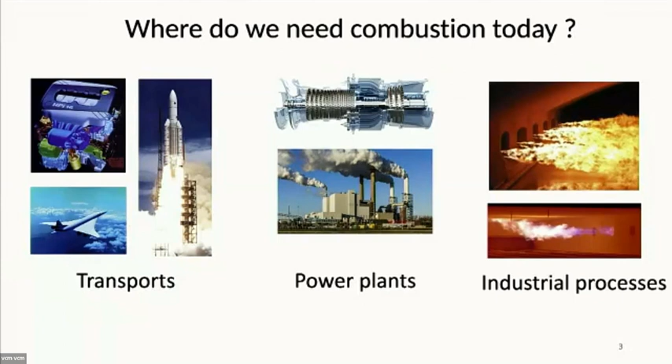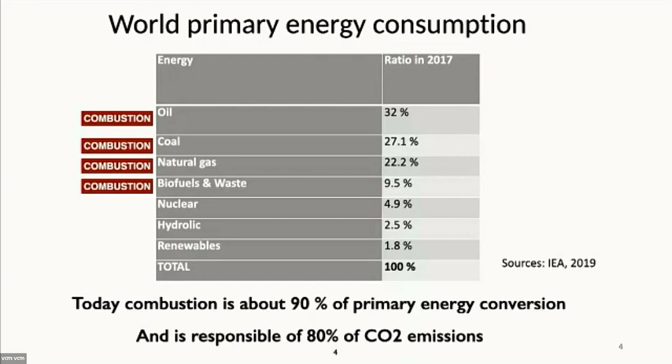So the first question is, where do we need combustion today? If you have a quick look at where we need combustion, we use it in transport, power plants, and industrial processes. If we look at world primary energy consumption, and at what is the primary source of combustion, it's oil, followed by coal, followed by natural gas and biofuel. All of these are burned. And if you sum it up, you will figure out that combustion is about 90% of the primary energy conversion, and it's also responsible for 80% of anthropogenic CO2 emissions.

So now the question is, how do we meet the Paris Agreement on Climate from that point of view? Can we do without combustion? If you look at thermal car engines, it's clear that they tend to disappear for small vehicles in Europe. All new cars sold in Europe must have zero CO2 emission in 2035. So it's clear that it's the death of the ICE engine for small cars. However, ICE may still be a solution for heavy-duty vehicles and boats.

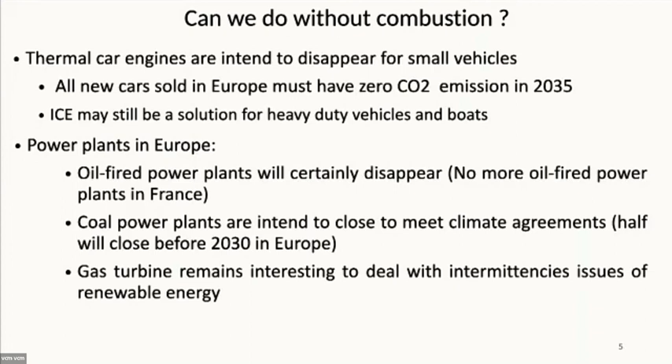Regarding power plants, there are no more oil-fired power plants in France. They intend to disappear in Europe. Regarding coal power plants, it's a bit more complex because it depends on the energy policy of each country in Europe, but apparently half of them should close before 2030. So the future won't be coal, fortunately. Gas turbines, however, remain interesting to deal with intermittency issues of renewable energy.

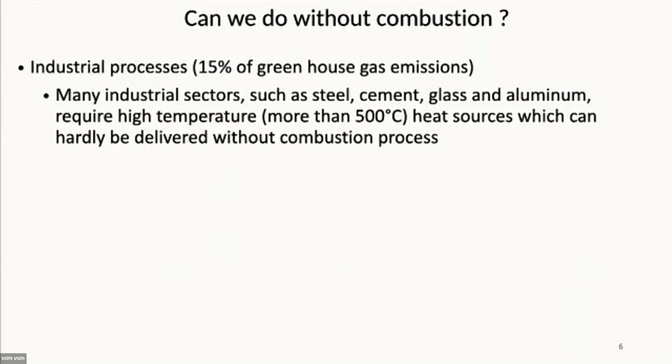Now, maybe less known: industrial processes. Industrial processes represent 15% of greenhouse gas emissions, and many industrial sectors, such as steel, glass, and aluminium industries, require high temperature sources that you cannot manage without a flame. So you need flame to produce glass. And finally, I will conclude with aircraft. The math is quickly done: 1 kilogram of kerosene represents, in terms of energetic density, 50 to 100 kilograms of batteries. So electrification will not replace combustion in aircraft in the short term.

So it means that combustion won't disappear now, but we need to do something: it's our mission to decarbonize the flames. If you look at the aircraft example, this is a roadmap of the aircraft industry, at least Airbus's. The idea is to put hydrogen at the center of the propulsion device. Hydrogen can be synthesized from H2O and, let's say, green electricity.

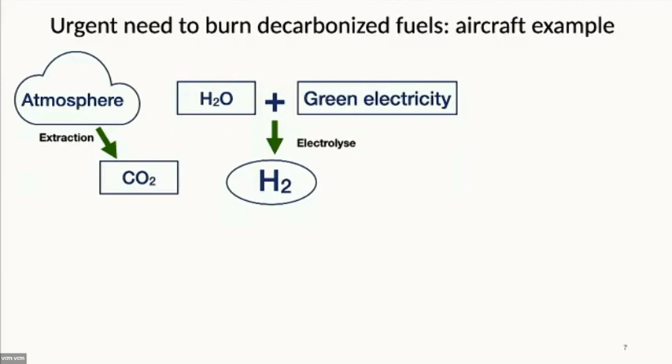If you can succeed to extract CO2 from the atmosphere, you can combine CO2 and H2, and using the well-known power-to-liquid route, it's possible to synthesize sustainable aviation fuel. You can also directly synthesize sustainable aviation fuel from biomass. Sustainable aviation fuel has a composition very close to kerosene, at least it can be done like that, which means it can be used as a drop-in fuel. At the end of last year, in 2021, the first aircraft fueled by 100% SAF flew.

Now it's interesting to see what the impact of this change will be in terms of CO2 emissions. This graph is extracted from a think tank work called the SHIFT project, led by Jean-Marc Jancovici. They did a study in France and tried to predict the scenario of CO2 emissions depending on the actions taken. The black line here is a target you must satisfy to stay below 2 degrees Celsius of global warming.

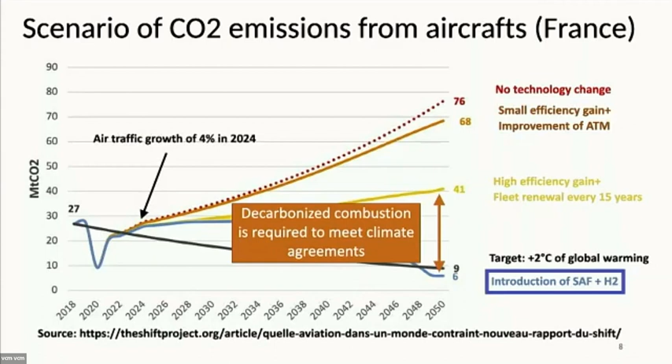Now, if you introduce sustainable aviation fuel and hydrogen gradually, then you can pass below that limit. So decarbonized combustion is required to meet this climate agreement.

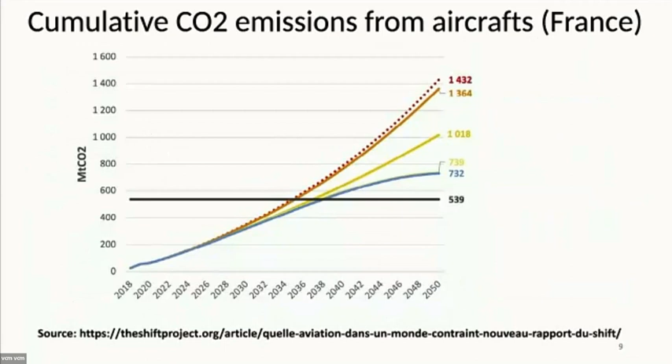Well, what's not totally true is that if you plot the cumulative CO2 emission, you're not good enough, because it takes too long to pass below this limit. So it means that it won't be sufficient. The decarbonized combustion flame alone will not save the world. We also need to take the plane less. That's what he's saying: to pass below this limit in 2050, air traffic growth must stick to 0.7%, even not decreasing, but not moving to 4%.

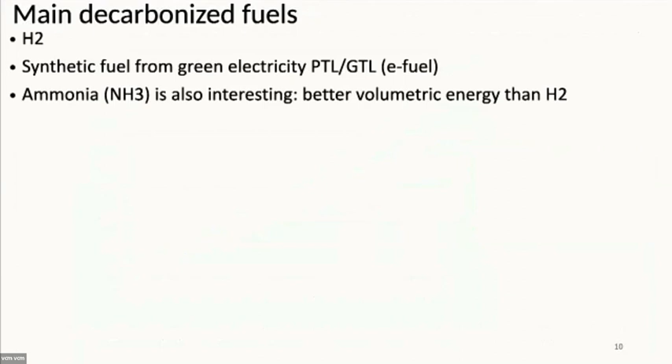What are the main decarbonized fuels? The main decarbonized fuels are hydrogen, synthetic fuel from green electricity (all kinds of e-fuel), ammonia—which is interesting because it has better volumetric energy than H2—and biomass/biofuel, such as bioethanol and so on. All of these are CO2 neutral.

So they don't produce CO2. However, pollutants are still emitted—unwanted species such as unburnt hydrocarbons, soot, carbon monoxide, sulfur oxide, and mainly nitrogen oxide. The problem with these species is that they are dangerous even in small quantities, for both health and climate. So there's a challenge now for combustion engineers.

What they need to do is design low-pollution combustion chambers for decarbonized fuel—how to burn this new fuel while keeping low pollutant emissions. The main strategy is to control the temperature, to decrease it. It's well known that if you decrease the temperature, you reduce NOx production.

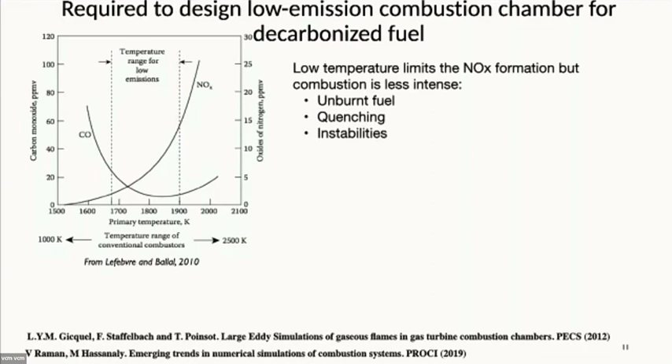However, the problem is that if the temperature gets too low, you will not burn correctly—you won't burn everything, and you may produce CO. You can also promote quenching issues, which lead to instability problems. So the big challenge of designing future combustion chambers is here.

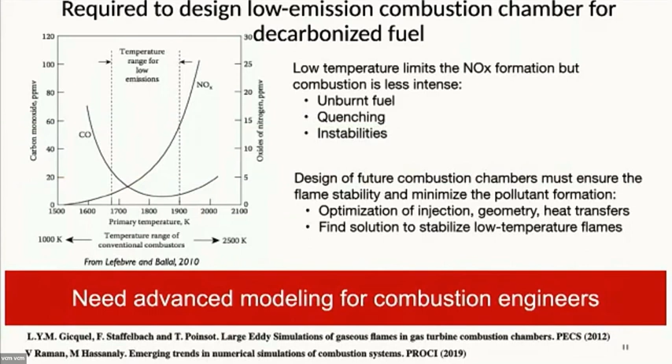You must ensure flame stabilization while still minimizing pollutant formation. This means you need to optimize the geometry, the combustion chambers, the injection system, and perhaps find new and innovative solutions to stabilize low-temperature flames. For that, you need advanced modeling—this is our job as combustion engineers. There are a couple of reviews I'll mention that discuss this in detail.

To summarize, let's talk now about the physical challenge. Physical challenge for high temperature combustion regime are not so high. Why? Because in terms of turbulent and chemistry interaction, turbulent mixing timescales are quite disconnected to the flame chemistry.

Under high temperature condition, chemistry is very active and very fast, so the interaction between flame and chemistry is quite limited, and the old-fashioned model works quite well. For instance, if you do some infinitely fast chemistry assumption, you will have a very good prediction of a turbulent non-premix flame. If you use a global step mechanism fit to retrieve the flame speed, then you will have a correct prediction of the flame stabilization for a premix flame.

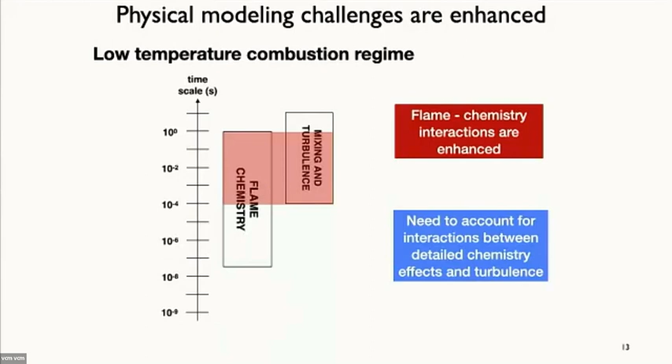It starts to be more complicated when you move to low temperature flame. Why? Because the chemistry is less intense, and you will broaden the range of interaction between the chemical species and the turbulence. This enhances the flame chemistry interaction and makes things more complex. So we need to account for interaction between detailed chemistry effects and turbulence.

This gives us the introduction of my talk, and the objective today is to discuss the modeling strategies for including detailed chemistry effects in turbulent flame simulations. I will mainly have two parts. First, I will talk about simplified chemistry models, and then I will discuss the coupling of chemistry modeling with turbulent flow simulations.

The complexity of a detailed chemical scheme is directly connected to the nature of the fuel that you are burning. If you consider H2, with 10 species and about 50 reactions, you are able to reproduce quite well the flame heat release and the flame speed. However, if you want to include NOx formation, or if you want to burn ammonia, then about 30 species are needed, and you need to account for around 200 reactions, which is not so small anymore.

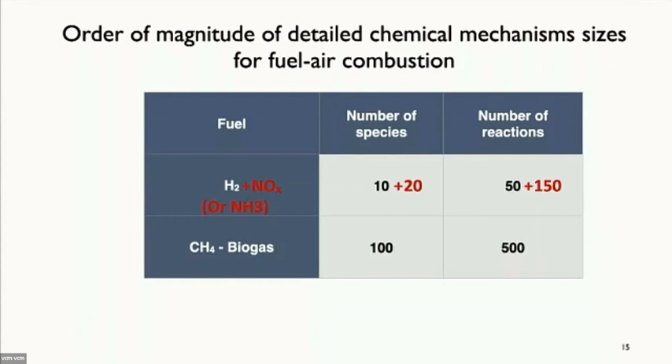If you move to methane, you need 100 species. And if you want to consider kerosene or sustainable aviation fuel or biofuel, then at least 1,000 species and several thousand reactions will be needed.

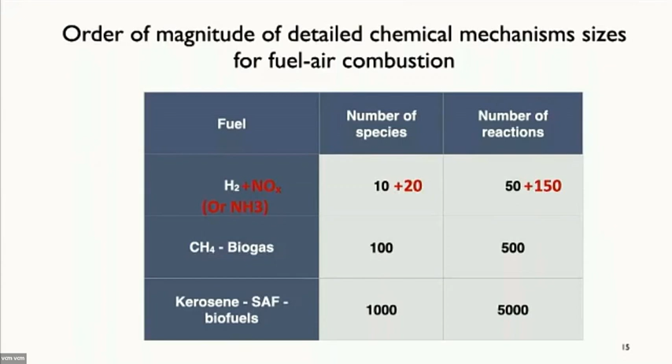What is the problem? The problem is that now I want to connect this detailed chemical scheme with a CFD flow solver. I have to come up with a standard Navier-Stokes equation: continuity, momentum, and energy. And then I need to add one balance equation for each species involved in the detailed chemical scheme. So you end up with this set of balance equations.

And here you have to face two problems. First, there are too many equations. The number of equations is very high, so obviously it will be complex to solve. Secondly, it's not the only reason.

Secondly, these chemical reaction rates are very, very stiff. Why? Because there are radicals that are highly produced and highly consumed. This causes very small time scales, very short time scales, and also stiff gradients. Numerically, from a numerical point of view, capturing this is very costly.

So the challenge is to simplify this chemistry modeling, but still we want to predict physical phenomena which are sensitive to complex chemistry effects, such as pollutant formation or extinction or ignition phenomena.

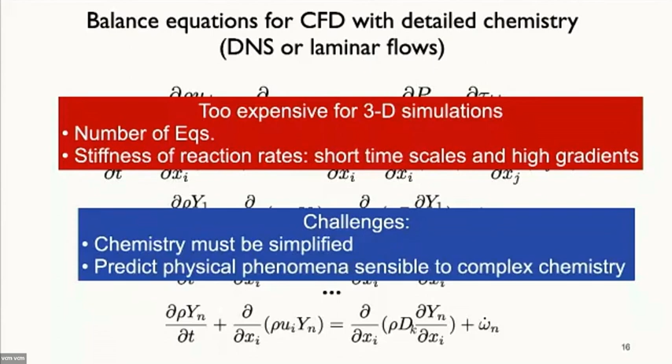So let's consider now a detailed chemical scheme made of N species. Any thermochemical variables, such as the chemical reaction rates, can be expressed directly in a space called the chemical space. It will be uniquely defined by Arrhenius law in this chemical space made of the pressure, temperature, and a vector of species mass fraction of dimension n.

So it means that any chemical scheme will be defined, will have a given range of validity. So the range of validity of a detailed scheme covers a space or a subspace in a chemical space.

The fact is that most of the time, when you want to use a detailed chemical scheme to compute a practical application, the chemical space covered by a practical application is in general much smaller. You don't use all the space, the range of validity. So this detailed scheme is somehow oversized in comparison with what you need.

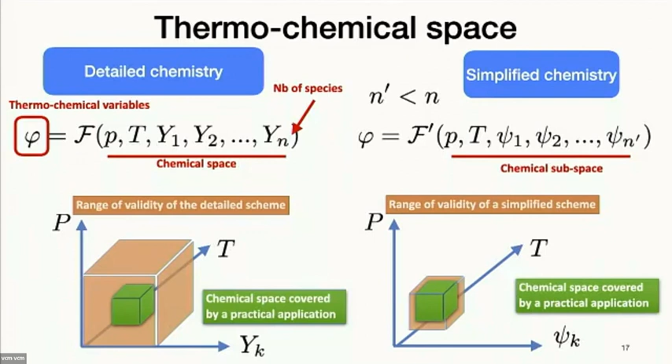So this is the idea of simplified chemistry models: to find a dimension smaller than the number of species, to re-express this thermochemical state in a new chemical subspace. And the goal of the game is to find a simplified scheme whose range of validity is as close as possible to the chemical space covered by a practical application. So from that, several methods have been developed by researchers to simplify the chemistry modeling. There are mainly three main approaches.

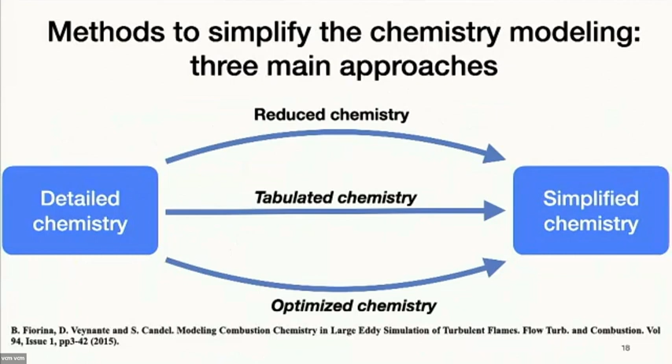The first one is to reduce the chemistry. The second one is to tabulate the chemistry, and the last one is to optimize the chemistry. So I will discuss briefly all these methods.

One of the most famous methods is reduced chemistry. It's composed of two main steps. You start from a detailed chemical scheme, and the first step is to obtain a so-called skeletal mechanism. For that, you need to remove redundant species and reactions that will not affect some target flame properties.

This was initially done by hand, so it was complex to apply to large and very large mechanisms, but significant improvements have been made by several authors, such as Turanyi with the introduction of the sensitivity method, and then Lu and Law proposed the DRG method, which was extended to the DRG-EP method by Pepiot-Desjardins and Pitsch.

Once you have this skeletal mechanism, you can proceed further with the reduction by finding analytical relations between species. In general, you do that by assuming quasi-steady state. Again, automatic methods have been developed, such as CSP or the level of importance method.

If you find an analytical relation between two species, it's good because you don't need to transport these two species anymore. Only one balance equation is required, so you can save, again, CPU time.

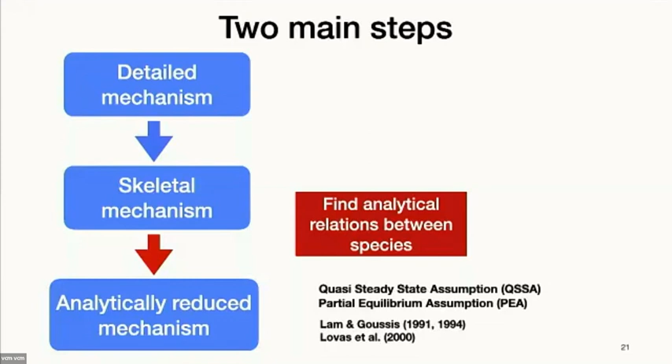So now tools are mature enough — there are several tools that have been published, mature enough to automatize the reduction process. We can, for instance, cite the Arcane code, developed jointly between Cornell University and CERFACS.

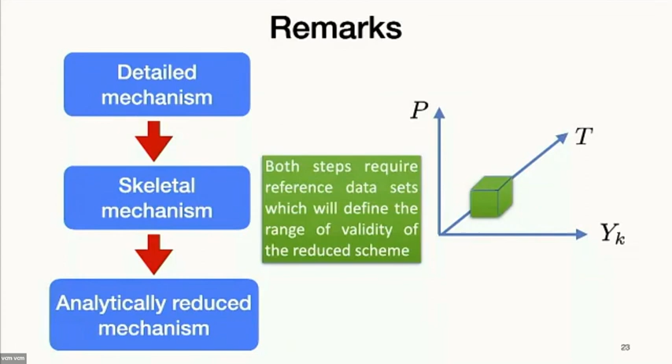It's important to note that both steps require a reference data set. If you want to find which species are redundant or which species are at quasi-steady state, you need to define a reference case to compute these terms, and by doing so you will somehow define a range of validity. I will show you an example.

For that, I took the LU19 analytical mechanism developed by Lu and Law. They start from a detailed GRI mechanism made of 53 species. They applied the DRG method to obtain 36 species and 222 reactions, and then they find an analytical relation between species by applying quasi-steady state assumptions.

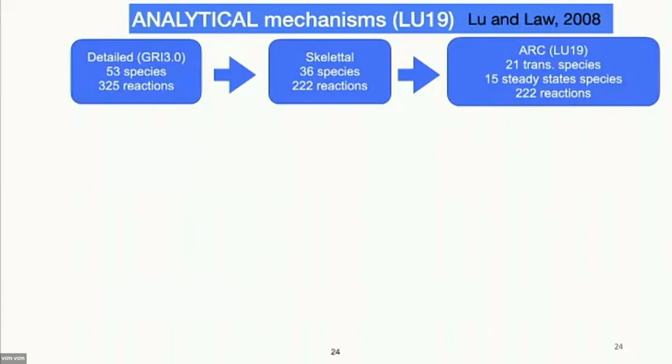I will now compare the reference detailed chemical scheme with this analytical scheme. There is a canonical but challenging case to check if a reduced scheme is working: take simply two flames, one premixed flame and one non-premixed flame. If you are able to capture both flame configurations with the same reduced scheme, you are doing a good job.

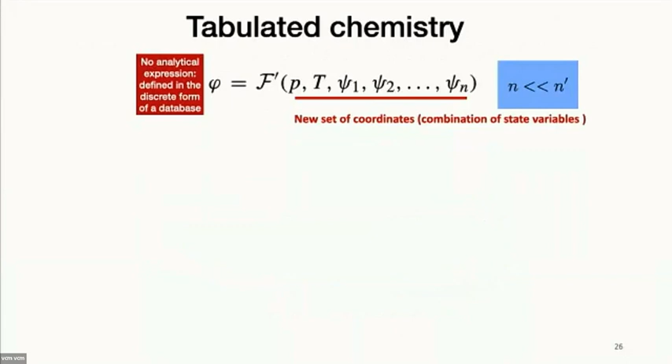Now I will introduce the other method: tabulated chemistry. The idea is not only to reduce the number of species, but to go a bit further — to re-express or project the thermochemical state into a new set of coordinates with much lower dimension. In general, this set of coordinates is a combination of state variables.

The objective is to tabulate the thermochemical state in a lookup table during a pre-processing step. The key issues are how to identify this reduced subspace and how to build up the chemical table or manifold. Sometimes you can also have issues because the table becomes too heavy and you may have memory size issues.

Tabulated chemistry is very efficient because the accessed space is confined to a low-dimensional manifold. This has been observed by Ulrich Maas and Dominique Thévenin. They did an interesting simulation.

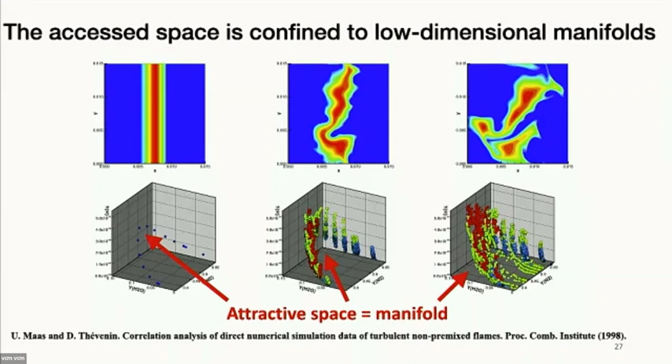H2, H2O, and H. What you can observe is that there is an attractive space, called a manifold. There is an attractive space, and you can also observe that the dimension of this attractive space tends to increase with the complexity of the problem. But there is a strong attractive space.

Initially, Ulrich Maas and Steve Pope proposed a method to automatically identify this attractive space. It is the so-called ILDM method. They succeed in identifying this space by computing the eigenspace decomposition of the Jacobian of the reaction rates.

This works very well if you want to capture the high temperature region of the flame. However, you start to have problems in low temperature flame because the chemical reaction competes with the molecular diffusion, and the size of the attractive manifold becomes too large, or at least with ILDM it's difficult to compute.

So an alternative used in many applications today is to compute directly the manifold from laminar flame elements. This method is called flamelet, or flamelet-based tabulated chemistry method. The idea is to identify a set of flame elements, so initially you choose premixed flamelets, non-premixed flamelets, or a zero-D reactor, for instance.

If you use non-premixed flamelet, you are using the so-called flamelet model developed by Peters. If you use premixed flamelet, these are the FPI or FGM techniques. A flamelet library is computed after selecting this flamelet.

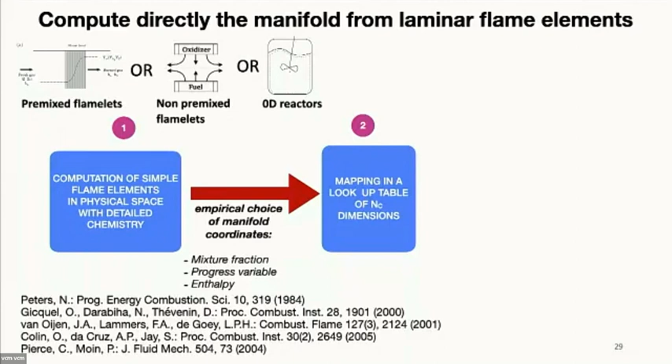But this is completely empirical, so you have to do it a bit by hand. At the end, everything is mapped in a lookup table of NC dimension, where NC is the number of manifold coordinates. You can then couple this manifold with a CFD solver by solving, in general, one balance equation for each

manifold coordinate, picking from the chemical lookup table the thermochemical ingredients needed to perform the simulation. This works as soon as the range of validity of the tabulated chemistry method is in agreement with the chemical space covered by the applications you are targeting.

If we go back to our previous example, we have computed a chemical lookup table made of premixed flame elements. If you use this chemical lookup table to compute a premixed flame, there is no surprise, it works very well. You see an excellent agreement between the two solutions.

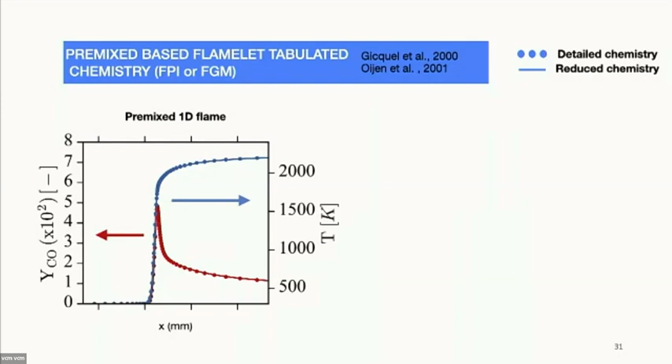However, it's not going to work anymore if the chemical space covered by the practical application does not fit completely the range of validity of the tabulated chemistry model. If you do the same exercise as before and apply this tabulated chemistry method, made of premixed flamelet, to a non-premixed flame, we will see that the temperature is quite well reproduced. It's quite okay for the temperature, but you completely mispredict the CO mass fraction, so there is a poor prediction of CO with the tabulated chemistry approach.

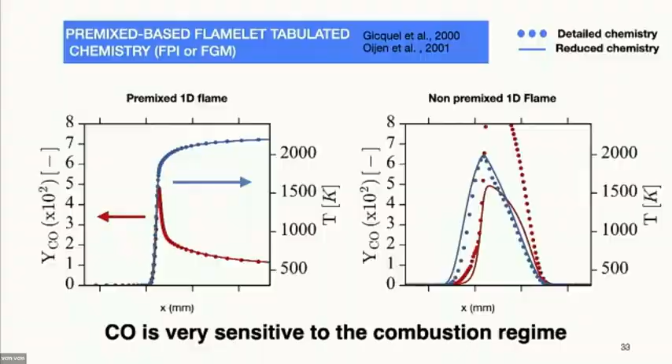So what to do? There are several solutions for that. The first solution is to compute multi-regime manifolds. Instead of first computing elements in the physical space and then projecting into the manifold, it's possible to directly write down the balance equation of the manifold directly in the reduced coordinate space. This is the REDIM, reaction diffusion manifold approach, developed initially by Bykov and Maas.

An alternative is also the multi-regime flamelet manifold, which is a similar technique. The fact is that when you write down this equation, there are some terms that appear, which are the gradient of the coordinate in the physical space, and these terms need to be modeled. How do you model this term?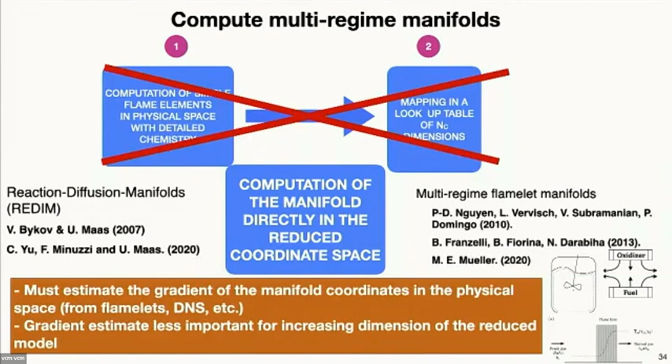You need in general to define a reference combustion element, so again you need somehow some physical representative flamelet at the end to close this equation. However, it has been observed that this gradient estimate is less important as the size of the manifold increases.

So an alternative would be to include directly a wide range of different flame elements in the same manifold. I told you before that in general we either choose premixed flame, non-premixed flame, or zero-D reactor to be tabulated in the same table. Here, the idea will be to try to tabulate all these terms in the same database.

The problem is the empirical choice. It's not complex to compute these flame elements, we know how to do that, but the question is how to empirically choose the manifold coordinate. It's not going to be trivial anymore to find the right coordinate.

Here, machine learning tools are quite interesting for that. For instance, if you look at the work from Alessandro Parente's team, they use machine learning to identify this technique, and in particular they develop the local PCA, principal component analysis method, which is good because it can post-process an ensemble of data and find what are the best coordinates that reproduce most of the variance of the covariance of this data.

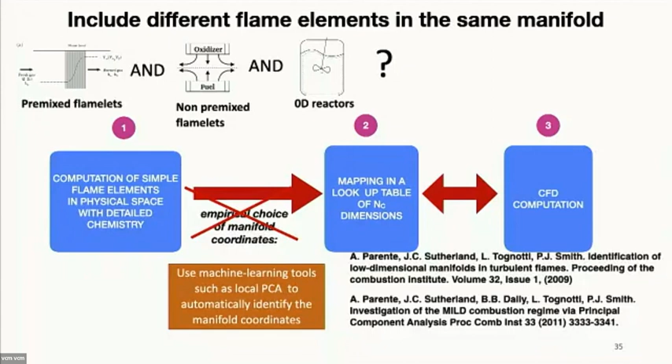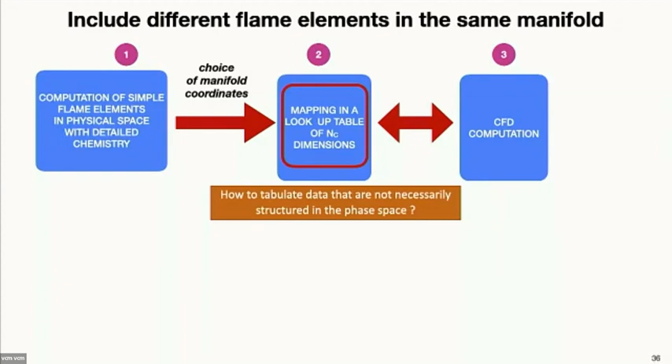Then you have to face the second issue: when you have many different data to be tabulated, these data are not necessarily structured in the phase space. So you need to find a solution to interpolate this data, and for that you can also use supervised nonlinear regression algorithms, such as neural networks, artificial neural networks, or Gaussian process regression. So these are the actual research topics on that.

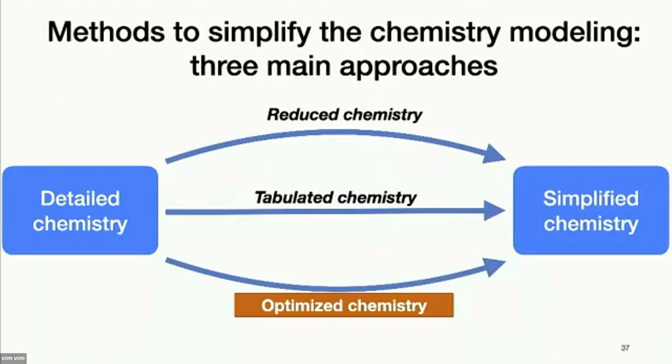Now I will move to the third approach, which is the optimized chemistry method. Actually, optimized chemistry is a very standard technique, maybe the oldest way to include detailed chemistry effects into a CFD simulation. It's also called the global empirical step mechanism. The idea is to select one or two reactions, a few species, and to optimize the reaction rate of the species to achieve some target flame properties.

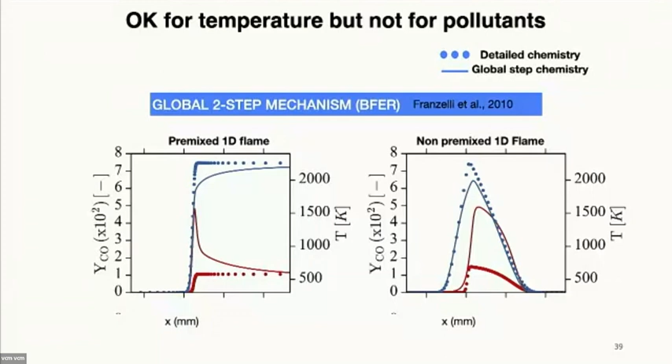If you apply this global scheme, now going back to our canonical tests, if you apply it to a premixed and non-premixed flame, it's quite okay for the temperature, predictions are not too bad. However, you are not able to predict the CO at all. Why? Because the CO present in this mechanism is just an artifact - it's an intermediate species, but it does not really represent CO. It's just used to tune and obtain the right flame speed.

This motivates us at EM2C to develop a new approach called virtual chemistry. The idea is to build up a reduced chemical scheme from scratch, using virtual species and virtual reactions whose chemical rate constants and thermochemical properties are optimized.

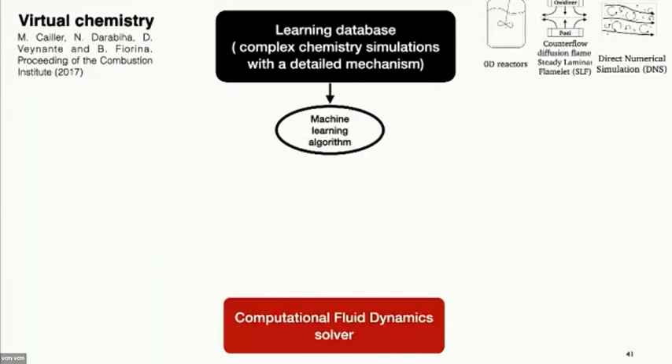So we first need to generate a learning database. Again, to generate this learning database, we can select and pick up different flame elements such as premixed flames, non-premixed flames, zero-D reactors. And then we use a machine learning algorithm in order to train several independent schemes.

The first one is we train a main virtual mechanism. Here I show you an example of a two-step main virtual mechanism, where I is a virtual intermediate species and pK is a set of virtual products. The scheme is optimized to capture the right temperature, the right heat release, and the density. This is then directly coupled to a CFD flow solver.

Then we developed several sub-mechanisms for CO mass fraction, for NOx, for soot. So we extend somehow the global step chemistry to be able to capture the pollutant predictions. I show you here two short examples of virtual chemical schemes.

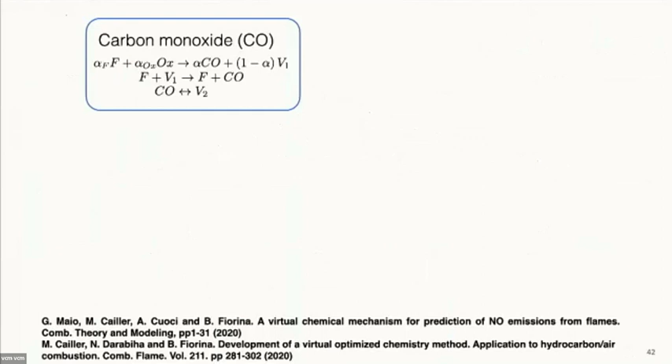On top, you have a three-step virtual chemical scheme to capture the CO prediction. Here you see that each rate of progress is closed by a standard Arrhenius law, and all the Arrhenius law parameters, such as the pre-exponential constant, the reaction order, or the energy of activation, are optimized by an in-house genetic algorithm to satisfy the learning database.

We also developed a mechanism for NOx formation. Here we have a 6-step mechanism with 2 steps dedicated to capturing the fast and prompt NO, and the last 3 steps dedicated to predicting the thermal NO production at the slowest time scale, and also the reburning process.

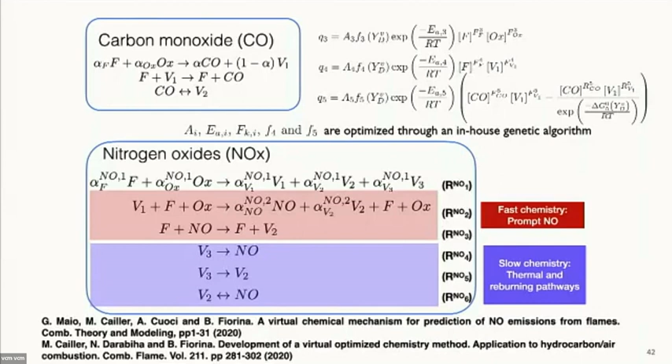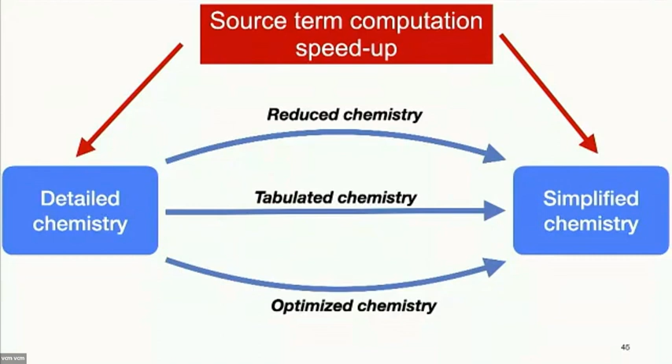Some efforts can also be done to accelerate the computational speed up. Why? Because many CFD solvers employ an operator splitting method for detailed chemistry flame simulation. This means that most of the CPU time in a CFD flow solver, when you have a very large mechanism, will be spent on the source term computation. So effort made to speed up the computation cost of reaction rates is relevant.

So many techniques have been developed to accelerate the computational source terms. For instance, we have the ISAT method, which consists in tabulating on the fly the chemical reaction rate during computations. There are some stiffness removal techniques, adaptive chemistry, where the idea of adaptive chemistry is to use different reduced schemes depending on which region of the flame you are located. And finally the dynamic cell agglomeration.

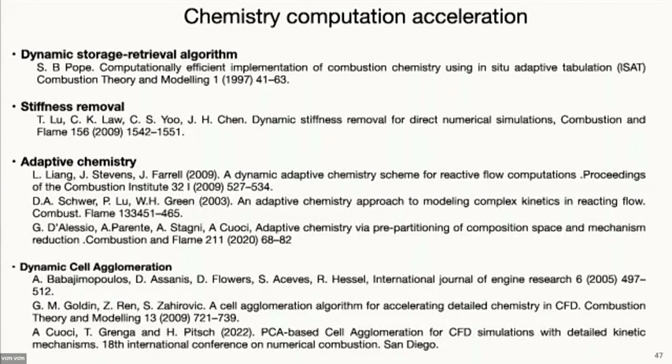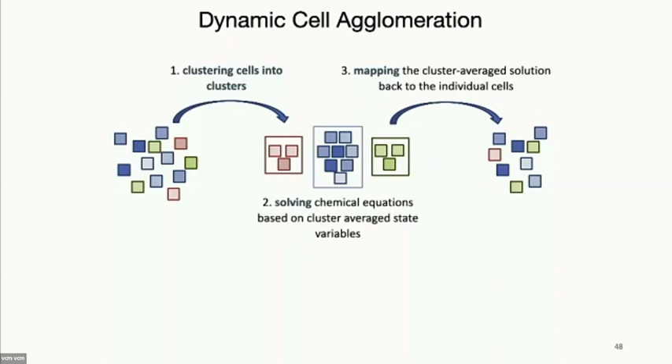I will develop a bit more this one. The idea of dynamic cell agglomeration is to start from a grid that discretizes the flame. Instead of solving the chemical reaction rate on each point of the grid, which is very expensive, the idea is to cluster the points that have the same thermochemical properties, and then to compute the chemical reaction rates only once in each cluster. So you save computational time, and then you can map back the solution to the individual cells.

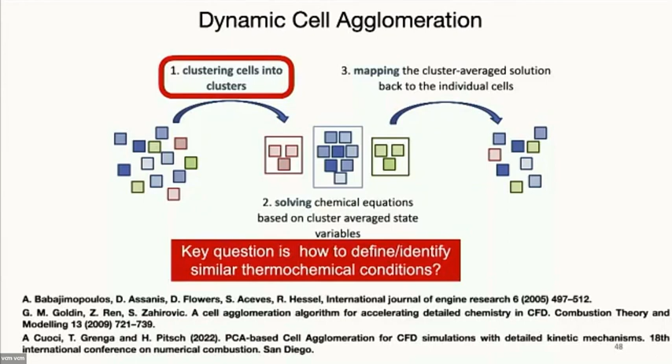So several studies have been performed to develop this dynamic cell agglomeration. Here are some examples from the literature. But the key question, when you do that, is how to define and identify the similar thermochemical condition. How can you cluster the grid?

PCA, principal component analysis, is again a quite interesting tool for that. This PCA method has been used, and it leads to the PCA square method, which is a quite new method developed by Alberto Cuoci, Grenga, and Heinz Pitsch. They use PCA to dynamically identify the optimal set of relevant features, and they have applied it to simulate non-steady, non-premixed laminar flame, a pulsated flame. They compare here the full detailed chemistry solution against this PCA square method, and you see a very good agreement for both fields.

So it works quite well. The good thing with this method is that you can control the error in two ways: by playing with the explained variance, which is the number of principal components used at the end of your PCA to describe the main features, and the second parameter is the clustering tolerance, which is the discretization of the PC's dimension. They succeed in having a speed up of 4 to 10, depending on the error.

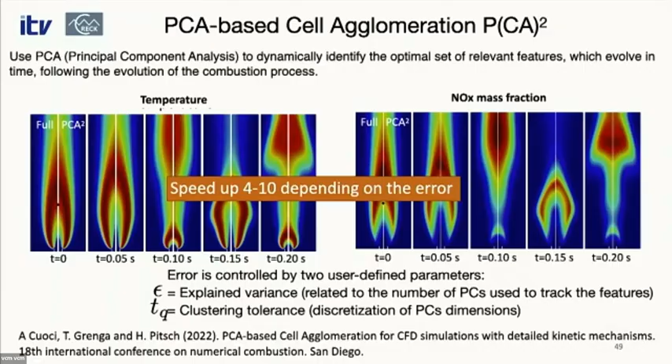Now we will stop a bit and try to analyze and compare all these reduced chemistry methods. In all these methods, you can see a common point: the range of validity and the cost of a reduced chemistry method are given by the nature of the data that you use to simplify your chemistry.

For skeletal mechanisms, this is given by the target data used to remove redundant species and reactions, or to apply the quasi-steady state assumption. In tabulated chemistry methods it is simply given by the tabulated manifold, and in optimized chemistry methods it is given by the learning database. Range of validity and cost is also directly correlated to the dimension of the simplified chemistry method.

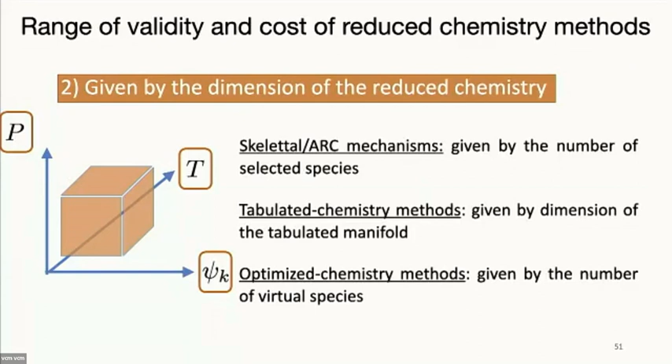At the end, for skeletal and reduced mechanisms, it will be given by the number of selected species. For tabulated chemistry methods, it will be given by the dimension of the tabulated manifold. And for optimized chemistry methods, it will be given by the number of virtual species and reactions that you will have at the end.

If you want to rank them and compare them in terms of practical use, cost, and accuracy, definitely the cheapest method is the tabulated chemistry method. It's extremely efficient—you cannot do better on simple flame configurations. So if you want to compute a simple turbulent premixed or non-premixed flame, it works very well.

It is, however, less suitable to complex flame structure. You need to extend it, as I discussed, but it can be quite complex because the generation of high dimension manifold can become very sophisticated. And I don't think a combustion engineer will have the time needed to build this manifold himself. So it can be a limitation of this technique.

Skeletal and reduced mechanisms: the good thing is there's been a lot of progress to automatize this method. There are several standalone codes that can automatically reduce the mechanism. However, it's still expensive. The number of species reduced is not always high enough, so you still end up with many species. Also, the stiffness of the reaction rate is still a problem.

Between them, you have the optimized chemistry method, which enables prediction of pollutants today thanks to a machine learning algorithm. But I think we still have some effort and progress to make in the optimization algorithm.

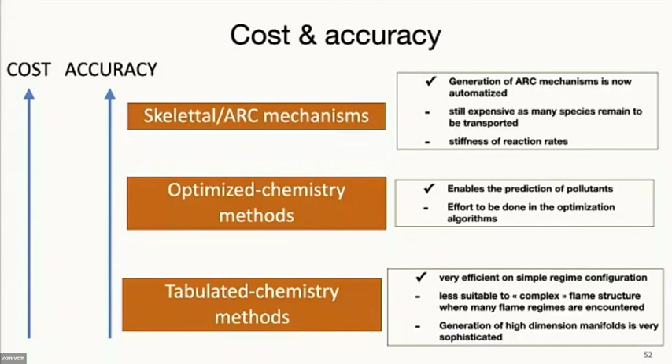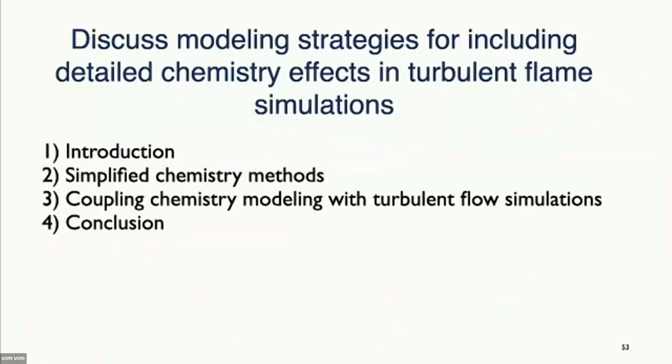Okay, so now I will move to the third part, and we'll discuss the coupling of the chemistry with the turbulent flow simulation.

We have our detailed chemistry, and we obtain the simplified chemistry model. Now the question is, how can I put that in my CFD flow solver? I will stick to turbulent flame simulation, so I have to choose either RANS or an LES approach. There are three methods to couple this simplified chemistry, or any chemistry model, with a turbulent flame solver: methods based on geometrical assumption, statistical analysis, or mixing-based approach.

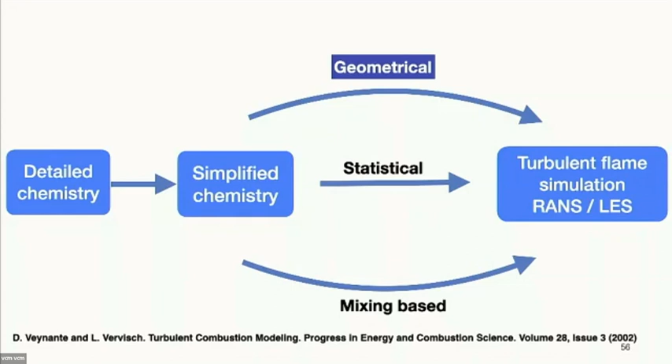We'll stick today to large eddy simulation because it's very interesting to capture unsteady phenomena, but some of what I discuss is also valid for RANS. Let's start with the geometrical analysis. The idea is simply to assume that a flame can be described by a surface of a given thickness. This works as soon as the reaction zone of the flame is not disturbed by turbulence. So geometrical approaches are quite well adapted to the flamelet regime.

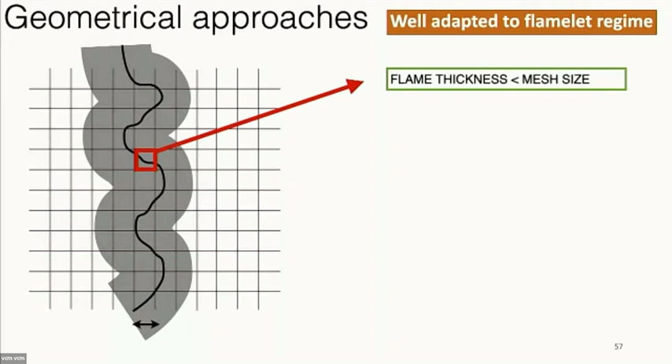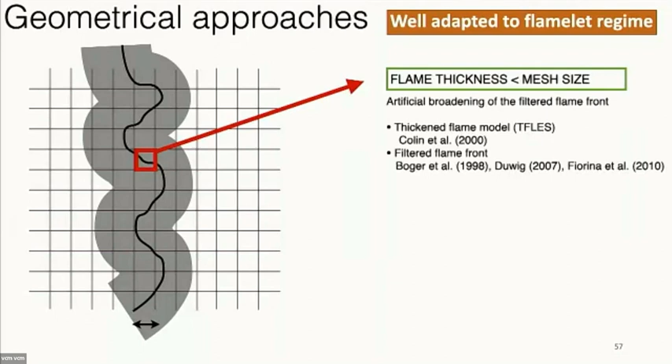You have to face two issues when applying a flamelet geometrical approach to large eddy simulation. The first: if this is your flame front and this is your grid size, the flame thickness is, in most practical applications, much smaller than the mesh size. So if you do nothing, you get numerical problems. You need to do an artificial broadening of the filtered flame front. There are different techniques, which I will discuss now. The thickened flame model and filtered flame front approaches are the main methods.

To explain the principle of flame thickening or artificial flame filtering, let's take again our canonical example, a laminar premix flame. I show here a variable called the progress variable. It's a good candidate to describe a flame because it moves from 0 in the fresh gas and reaches 1 in the burnt gases. You can see the transition between fresh and burnt gases, representing the thermal layer, or even the reaction zone. Here you can see that this reaction zone is not discretized—the grid size is larger than the thermal gradient. So if you plug this directly into a CFD flow solver, you'll have numerical issues and never recover the correct flame speed. The flame speed cannot be captured because you don't have enough grid points to measure the reaction rates.

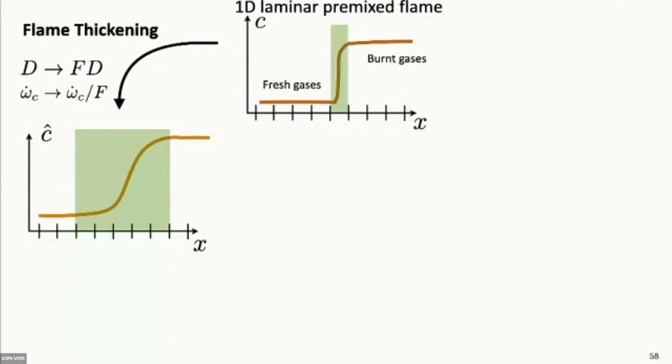So you can do some flame thickening. The idea is simply to multiply the molecular diffusion by a factor F, and at the same time divide the chemical reaction rate by the same factor F. If you do so, at the end you have a thickened progress variable—you obtain a thickened flame structure. If you choose the correct factor F, you can have enough grid points across the flame front to transport and propagate the flame at the right speed. You have to solve a balance equation for these filtered quantities, and this is the thickened flame model for large eddy simulation, the TFLES model. An alternative is to do explicit flame filtering.

So for that, instead of thickening, you filter. You apply a Gaussian filter explicitly of a given size delta.

And again, you can find the right flame filter size in order to be sure that your flame is well resolved on your LES grid. And you come up with another equation, which is an equation for the filtered progress variable or filtered species equation, which must be closed. There are different techniques, such as the F-TACLES approach that you have developed, to close this equation. This is the first problem, but that's not the only problem.

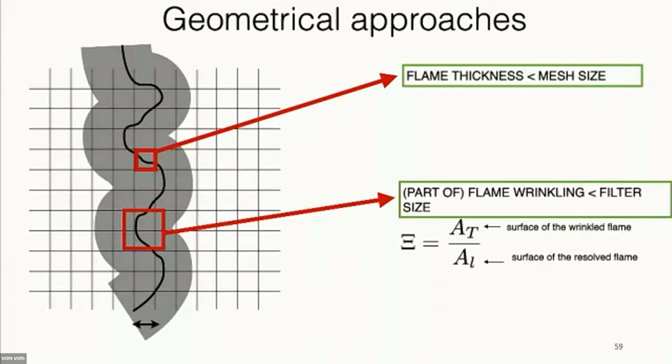The other problem is that some part of the flame wrinkling is not resolved. It means that turbulence will affect the flame, it will wrinkle the flame, but even in large eddy simulation we will not resolve the entire flame wrinkling. Some part is not resolved, and you need to provide a model for that. So the quantity you want to model is the subgrid scale flame wrinkling, defined as the ratio between the surface of the wrinkled flame versus the surface of the resolved flame.

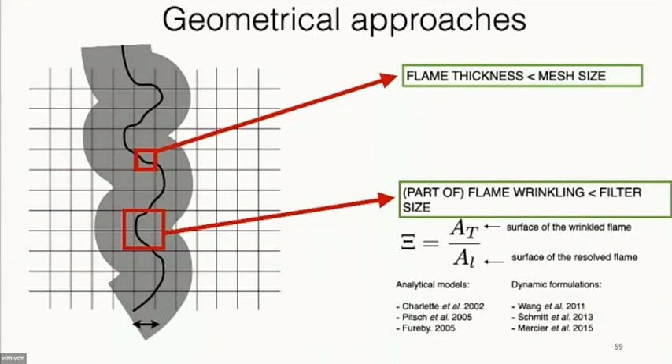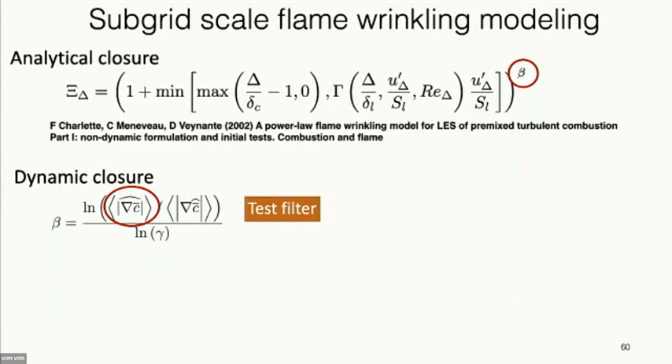For instance, dynamic closures have been developed. The idea is to use the solution of the LES and use a test filter in order to automatically identify and compute this term during a computation, so you don't have to tune it anymore.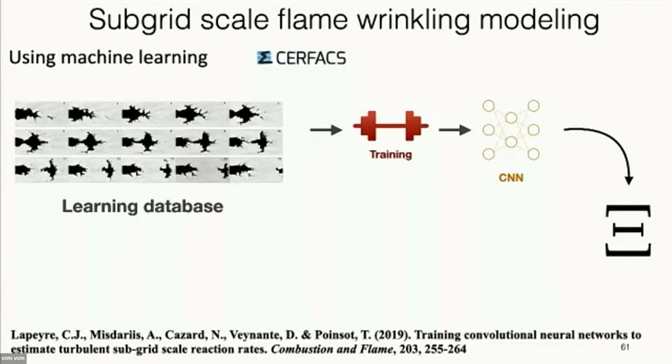There is another possibility, which is quite recent: using machine learning algorithms to model this subgrid scale flame wrinkling. This is some work that has been performed by Corentin Lapeyre and the Thierry Poinsot team. They generate a learning database made of solutions of a turbulent premix flame, and use this learning database to train a neural network method in order to obtain a model for the subgrid scale flame wrinkling. So this is another, more recent way to estimate this term.

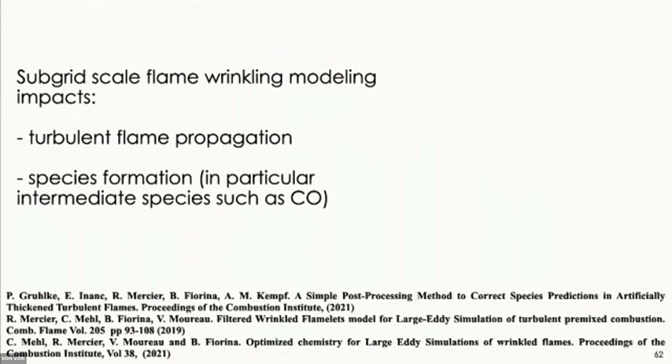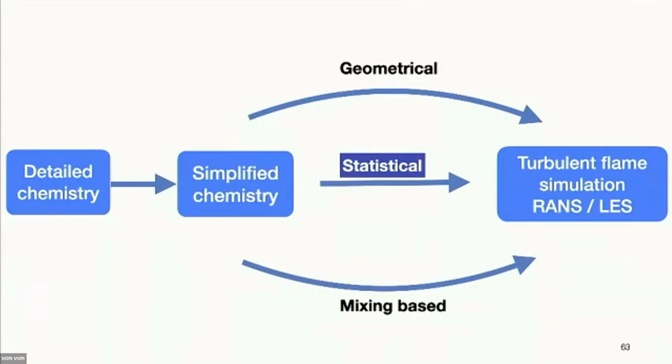Another technique to couple simplified chemistry with a turbulent flame simulation is the statistical approach. It aims to decompose a mean or filtered quantity by introducing a joint PDF. The key question is how to presume the shape of this PDF. There are presumed-shape PDF methods, and most of the time a beta function is assumed. It's cheap, but not always very accurate.

If you want to be much more accurate, you can move to a transport PDF approach, with either Lagrangian or Eulerian strategies. The last one is the mixing-based technique.

Here it's the opposite of the geometrical approach. You don't assume the flame is a surface, but that it's a kind of reactor. Within the reactor, the assumption is that there are some fine structures that are reactive and some surrounding region that is non-reactive. You mix these two quantities to estimate the filtered reaction rate.

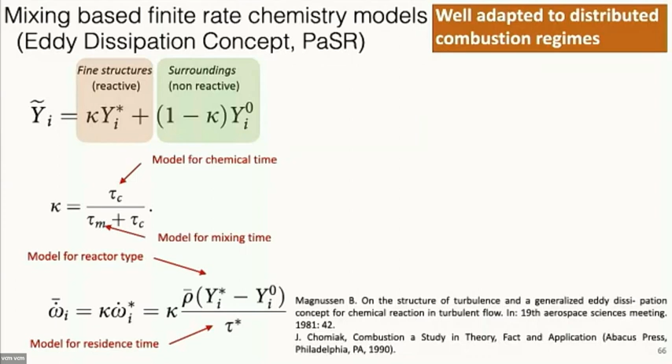So you end up with some terms that need to be modeled. When you develop this mixing-based model, you have many terms to model, so you need closure for that. However, it has been shown that this is quite well adapted to distributed combustion regimes, such as mild combustion, where the temperature is very low.

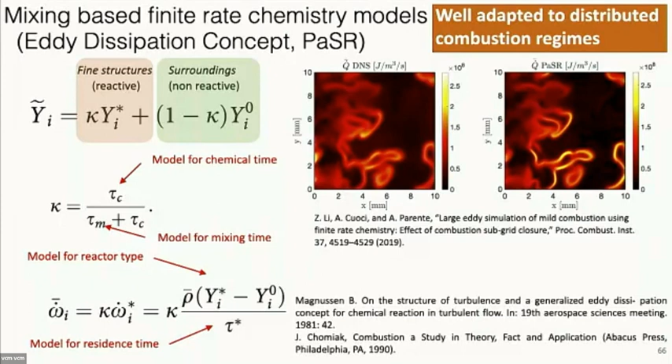This is an example of DNS post-processing performed by the Parente team, who show that this eddy dissipation concept works quite well.

Now we'll try to summarize what we have said. We identified three ways to move from detailed chemistry to simplified chemistry, and three ways to move from simplified chemistry to turbulent flame simulation. So there are many combinations possible, and a priori all combinations are possible if you want to move from detailed chemistry to a practical simulation. Everything is a matter of money—it depends how many CPU hours you have in your pocket.

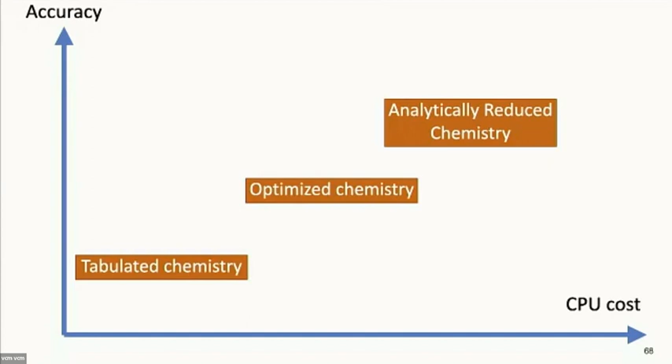Statistical presumed PDF is also quite cheap. Mixing-based models are a bit more expensive, and statistical transport PDF are quite expensive. If you combine two methods that are expensive, at the end it's very expensive.

This is an example of a very nice and accurate simulation that has been performed recently: a turbulent partially premixed flame in a swirl combustor, performed by combining a transport PDF method with an analytically reduced chemistry.

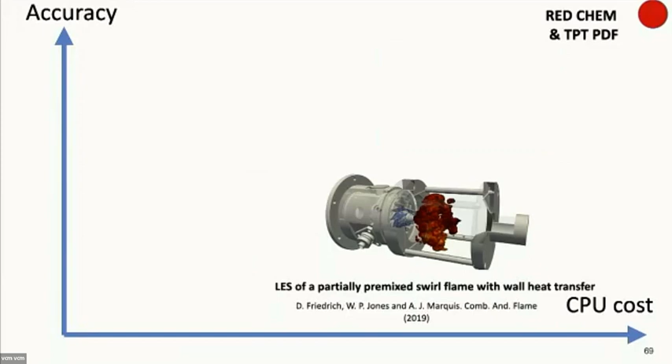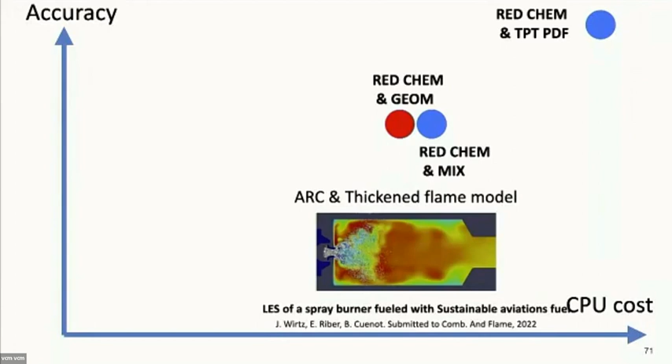This is a simulation obtained by the CERFACS group on a spray burner. You can also combine tabulated chemistry, such as here the REDIM approach, with a transport PDF—this was the same cost as reduced chemistry with a geometrical approach.

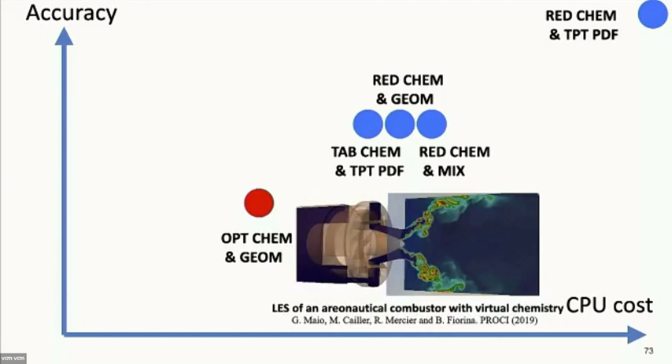We can also have optimized chemistry combined, for instance, with a geometric approach. Here the accuracy decreases, but so does the CPU cost. Finally, tabulated chemistry with a geometrical approach is the cheapest. So what is the use of this technique?

This is my point of view. I think the most accurate methods, which is what we see today, are limited to one-shot use. It's a good way of doing small experiments on realistic configurations, to understand the physics and what's happening, but you can pay for one simulation using several millions of hours, maybe. So this will definitely never be used in a daily design process by a combustion engineer.

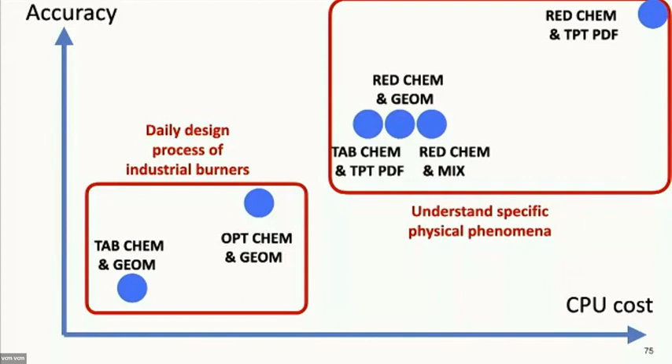That's why the most reduced chemistry methods, which are less accurate but can still be improved, are interesting, I think, for the daily design of industrial burners by combustion engineers.

I'll give a few words concluding, just one or two slides, about the hot challenges that remain for turbulent combustion modeling of decarbonized flames. If you look at turbulence, there are some specific issues dedicated to each fuel that we now have to tackle. For instance, for H2 flames, it seems that the differential diffusion phenomena in turbulent flames is very important. A recent study from Berger, Attili, and Pitsch shows that thermodiffusive instabilities will strongly affect the turbulent flame speed.

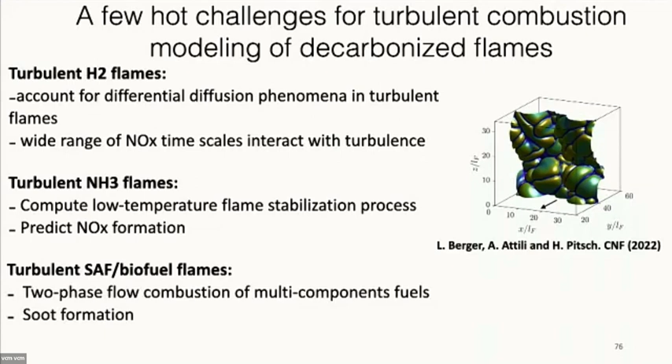Also, you have a wide range of NOx to capture. Ammonia is complex because you need to find a way to stabilize the ammonia flame, and it may also produce NOx. And for SAF, turbulence means you have to deal with two-phase flow flames and soot formation.

I would also like to conclude with some remarks about the role of machine learning in combustion modeling. As I tried to show you during this presentation, machine learning appears sometimes, and today it has been used, I think, by researchers to reinforce the classical modeling routes. You can see that it has been used to identify the best manifold coordinates, improve the subgrid scale flame wrinkling, optimize some chemical schemes, improve some optimized chemical scheme methods, or also find points with similar thermochemical properties. So it does not yet revolutionize the way we are doing things, or I don't know why.

Maybe we are too stuck to our habits, or not, I don't know. But this is how it works today. It's an open question. Maybe it will change later. We'll see. Thank you for your attention.